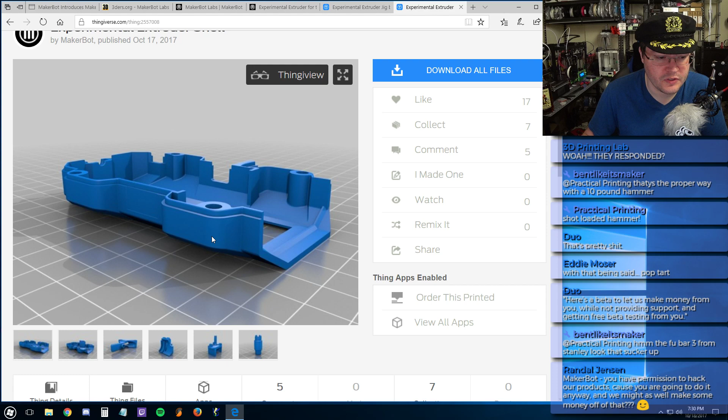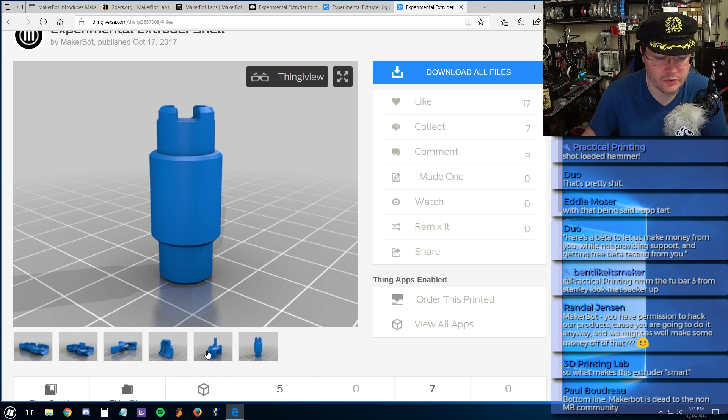And that being, they released on their own account the experimental extruder shell, and the whole assembly of the injection molded parts for you to print on your own to transform as you like, pretty much. I don't think it comes with the source files, just STL files. Yeah, just STL files. But these are so that you do not have to reverse engineer the design of the smart extruder. You can just 3D print the components or import them in your favorite 3D modeling software and modify them as you feel works best for your application. This would be able to, if you're trying to optimize use with flexible filaments, anything of that nature.

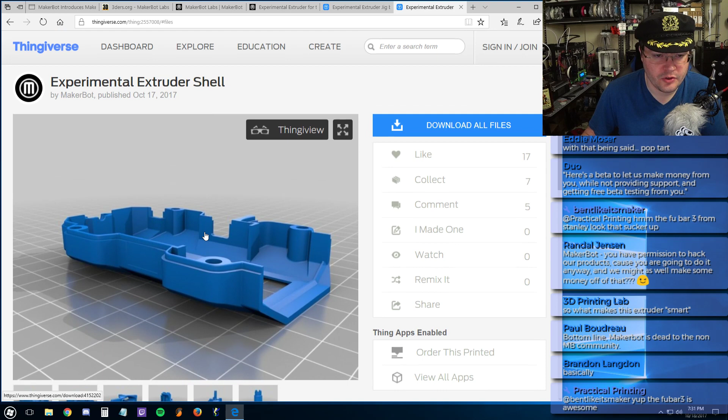So it's kind of an answer to their advanced user market, and they are making a very interesting approach to this because it's pushing boundaries. They say customizable hardware and software, experimental extruder, yada yada yada, and the hot end goes up to 235 degrees Celsius. So theoretically, you should be able to print pretty much any filament on this extruder that goes to 235 degrees Celsius.

Now everybody's been talking in the chat, I've seen multiple people mention it: not covered under warranty, not covered under maker care, etc. But there is a loophole to that. If you are caught using third-party filaments or trying to make modifications to your smart extruder, you could potentially void the warranty and maker care of your entire 3D printer, which can be troublesome if you have an educational environment, etc.

If you are running an experimental extruder, you run very low risk of violating any of your warranty terms or maker care clauses on your printer currently, as long as whatever you're experimenting with is going through the experimental extruder. The machine is smart enough to know that the experimental extruder is not the standard smart extruder, and the slicing software they utilize is smart enough to detect that you're using an experimental extruder and change the dynamics of how the software works to compensate, without causing you very much issues with worrying about voiding warranties or your maker care support on your 3D printer. Which kind of makes sense.

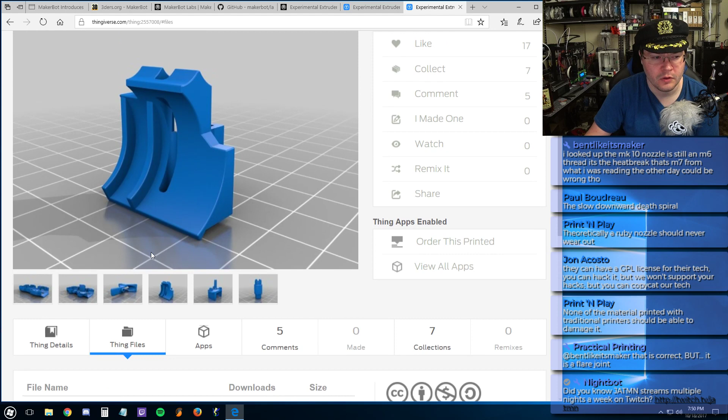It'll be very interesting to start seeing these out in the field and seeing what people say about them, whether they have better or worse luck with them, and what they're able to do now that they've got the actual injection molded files. You've got to admit, having this available as opposed to trying to reverse engineer it is kind of surprising.

It's true to spec. You 3D print it, and it's a 3D printed replacement of the injection molded part. They're straight on the injection molded parts. So it's interesting to say the least.

Let's see what's going on in the chat. Have tap-in die set, will travel.

Let's see here. Yeah, knowing Makerbot, custom thread, it's possible. Who knows, buy Makerbot. So abrasive filaments will still wear down a Ruby nozzle, but a whole lot slower than they would a hardened or stainless one. Anything will wear down a nozzle. A Ruby is really freaking hard, so your wear rate is significantly less. It'll still wear over time, but the Ruby's been tested up to like 30 kilos of non-stop abrasive filament, I think, without wear, in their lab tests. So that's quite significant compared to a plated or steel nozzle. You'll still burn through a steel nozzle.

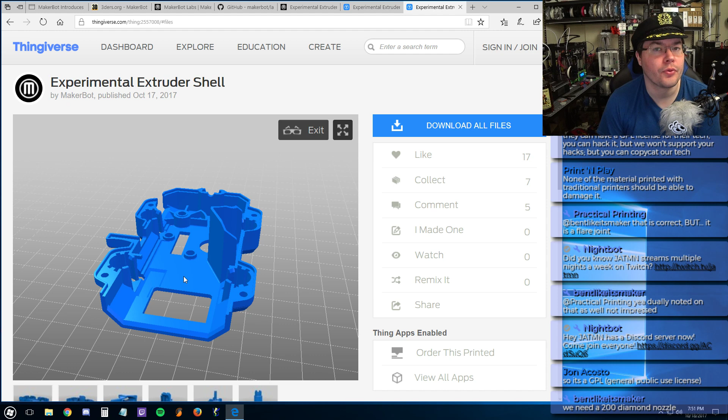Looked up the Mark 10 nozzle, it's still an M6 thread. Its heat break that is M7, from what I was reading the other day. Could be wrong though. So the M7 is the nozzle side. If you go into the heater block for the Mark 10 extruder, the Mark 10 extruder has an M7 thread, I believe it's the M7 thread on the nozzle itself. That's why the nozzles for your Wanhao Duplicator i3 don't work on pretty much anything else except those, and no other nozzles work on those, because it's a larger thread size.

Slow downward spiral of death. They can have a GPL license for their tech. You can hack it, but we won't support your hacks, but you can copycat our tech. Jon, that sounds about right.

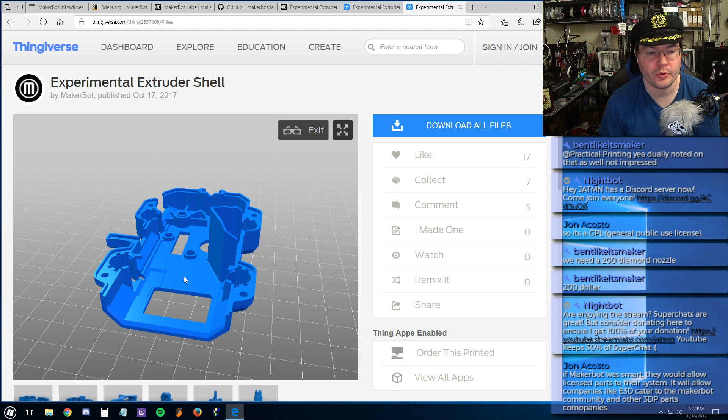But again, they're saying that if you hack this portion of it, you theoretically won't be violating the licensing at all, as long as it's just the experimental extruder that you're running all the hacks on.

None of the material printed with traditional printers should be able to damage it. Oh, you mean the ruby? Correct. You can still wear it out over time. Everything you can wear out over time. It's just how resilient it is to wear.

So it's a GPL, general public use license. Okay, we need a 200 diamond nozzle. $200 diamond. If Makerbot was smart, they would allow licensed parts to their system. It would allow companies like E3D to cater to the Makerbot community and other 3DP parts companies. It's gonna be similar to a car mod.

So who knows if they're gonna do that? I mean, who knows? Maybe E3D might reach out to them for whatever reason and say, hey, this is our drop-in replacement to your experimental extruder shell. Who knows? They haven't even specified what spare parts will be available for the experimental extruder.

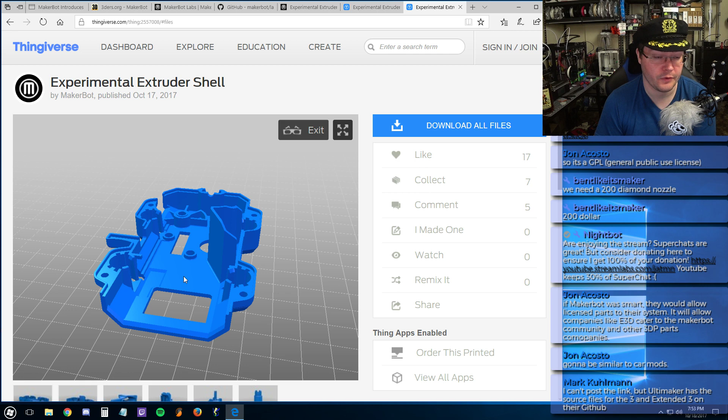At this current time, you can only buy the kit. You can't buy any replacement parts, from my understanding, or at least per my conversation earlier. So if you wear out your 0.4 nozzle, you have to go to your 0.6 because there's no replacement available yet. But they weren't saying that they weren't going to.

They just were not sure what the demands would be by their user base of what they should actually carry. So they're waiting for people to start running these things to see what kinds of things are requested by their user base, mostly I guess, that they should be carrying as replacement or field replaceable type items for this. Or if it would be worth it just to keep selling it as a kit, who knows.

I can't post a link, but Ultimaker has source files for the 3 and the extended on their GitHub. Okay, I'll find them. I'm very familiar with their GitHub. But thank you, Mark, I didn't know that was released already.

You may be able to print the enclosure and hack it into a different extruder, but you'd still have to make firmware adjustments if needed and get the electronics interface board. Correct. And like I said, we don't know what's available.

Or like mentioned before, maybe they'll allow a third party to contact them and get OEM rights or something to the boards. Who knows? We don't know. And the marketing department and anybody I talked to at Makerbot honestly either didn't know or wasn't able to tell me. It was pretty interesting.